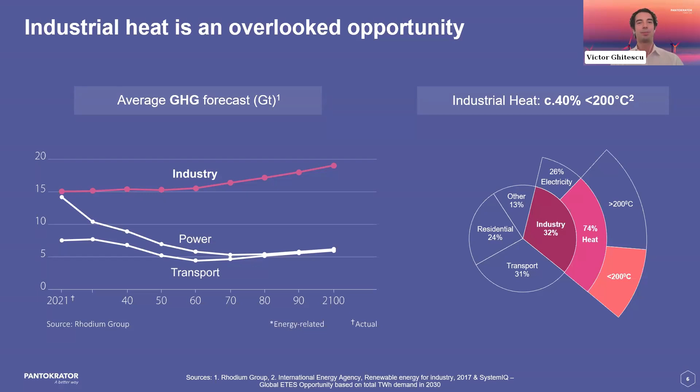Thank you, Andrei. As most of you know, there's been a lot done to decarbonize the power and transport industries in the recent past, and there's still ways to go. However, we think that today the biggest opportunity lies in decarbonizing the industrial sector, where about 3/4 of emissions come from industrial heat. And about 40% of this heat is below 200 degrees Celsius, which makes this portion of the market an ideal candidate for the use of heat pumps.

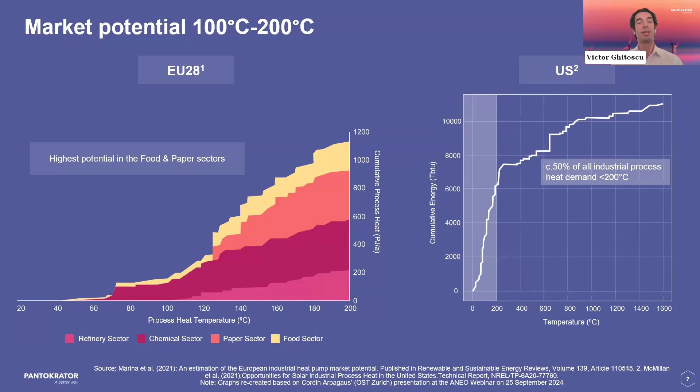As you can see, both the European Union and the United States follow a similar distribution when it comes to their process heat demand, with the European Union having about 40% of its demand between 100 and 200 degrees C, whereas the United States has about 50% of demand below 200 degrees. What's also interesting is that although most industries use some sort of low temperature heat, a few candidates stand out for immediate decarbonization using heat pumps: the food and beverage sector and the pulp, paper, and print one.

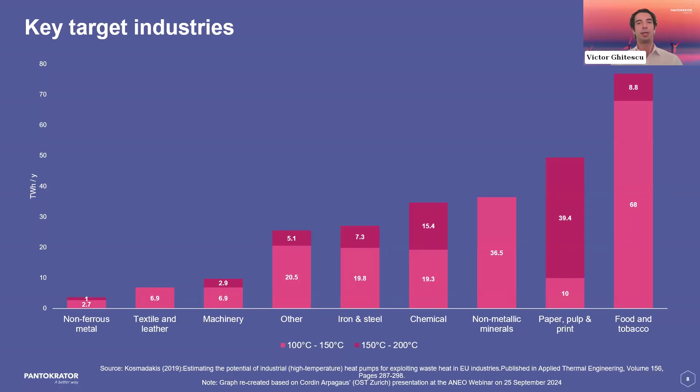Another interesting way to look at this is, as a potential heat pump manufacturer, as you increase your maximum potential temperature output, you unlock a bigger market share. As you can see here, when you go from about 150 to about 200 degrees Celsius, you unlock an extra 30% of the market. That's mostly because the higher temperature allows your heat pump to be used in a wider range of industrial processes.

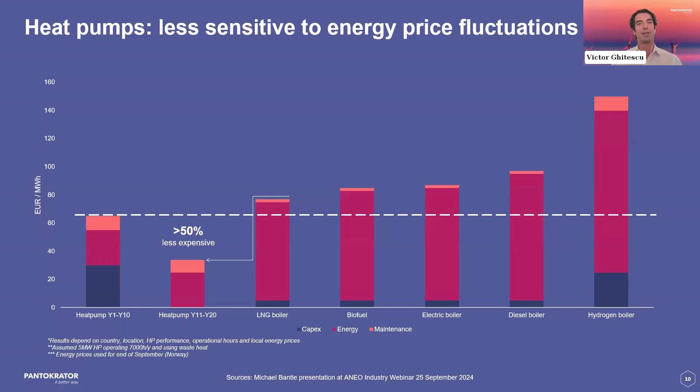to energy price fluctuations. And I want to say that we want to thank Michael from ANEO for providing us with this data. And I'm sure he's going to be able to offer you more color on his findings in the discussion following our presentation.

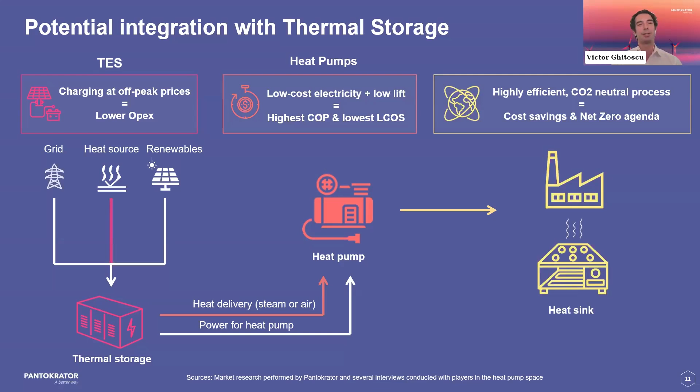Lastly, I want to say that as we've put this presentation and webinar together, we've spoken to a lot of companies and investors and even industry associations. And most of them agree that you're going to have more and more integrations in the future between heat pumps and some sort of energy storage, be it thermal or even lithium ion. We think that this will allow end clients or customers to achieve the lowest potential OPEX, lowest potential levelized cost of heat or steam, while also making good to their shareholders and stakeholders on their net zero initiatives and promises.

Okay, so just coming back to the capital raising side of this industry, today we're really focusing on the industrial side because I think that's where a lot of promise is. But we also thought we'd share what's happening on the residential side, because there is quite a bit of activity. It's a very distinctly different business. But I think given what we're seeing on the tech side, on the fit with the customer and how costs are coming down, from an investor standpoint, this is a place to start focusing, because I think in 25, 26, 27, we're going to see quite a few capital raises of a size that might fit some of the bigger investors.

Okay, so before I hand over to the group and introduce them, some of the areas that we thought are quite pertinent and will pop up in the discussion today is really about where's the technology going? What can it do? What are the implications for that? What's the technology readiness? Is there a barrier of lack of awareness, whether it's at the customer end or at the investor end, and what can we do to help that along? What are the roles that the regulators have to play in this? Also, there's the usual one of cost. How can we bring them down?

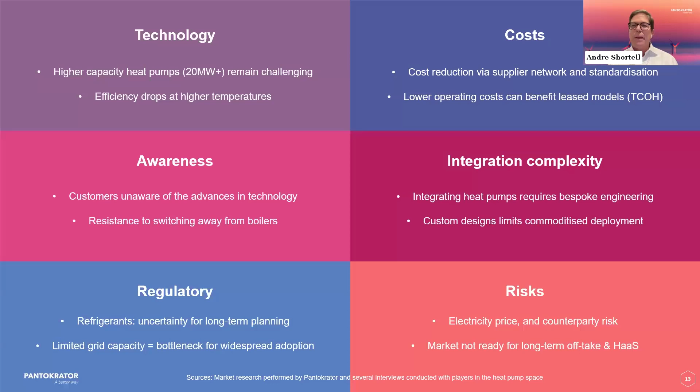this. So let me start by introducing the panel, and maybe I could start with Blaine. Blaine, I've always seen you as a big supporter of industrial heat generally, and of heat pumps specifically. So I think it'd be great if you could spend just 2 minutes on yourself and on what the RTC does to support this.

Thank you very much. So I'm Blaine Collison. I'm the executive director of the RTC. The RTC is, in fact, a global buyer-led coalition focused on decarbonizing thermal, particularly industrial thermal, with renewables. We work on three big lanes of effort: technology, market development, and policy. The bottom line here really is working with our key stakeholders, particularly the buyers, and we'll look at them in just a moment, to actually drive forward on implementation. Our end game is more projects in the ground, which leads to decarbonization. The RTC is co-convened by three organizations, C2ES, David Gardiner and Associates, and the World Wildlife Fund. And if you go to the next slide, please.

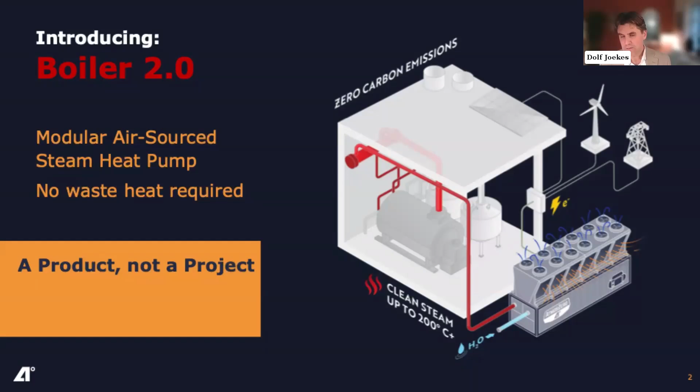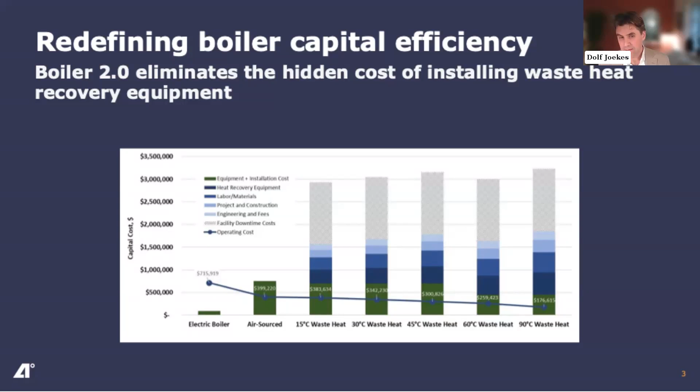Right. Okay. And as a bonus, in the next slide, in addition to providing low-cost steam, our Boiler 2.0 system that you can see here on the left can be integrated with a cooling tower, for example, or a chiller, thereby offering additional benefits to the lowest levelized cost of steam for your system.

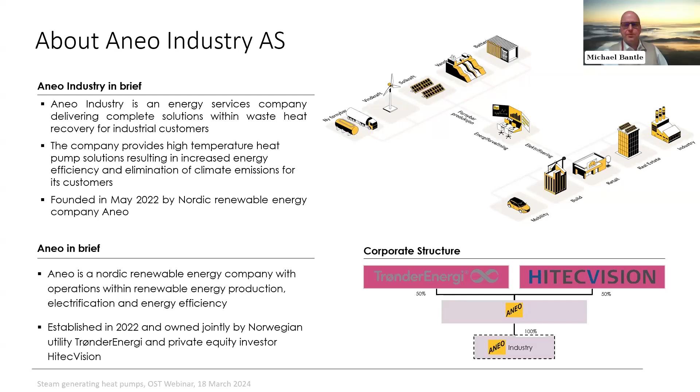Aneo Industry started 3-4 years ago as a project where the challenge or the target was to generate a heat pump that is generating steam and supply to an industrial customer, Felleskjøpet, utilizing excess heat from the same factory. And that was exactly what we then won the prize for, this system, which you can see on the next slide, at least parts of it.

So we were designing a heat pump system based on standardized components and natural refrigerants. This heat pump can utilize waste heat from 30 degrees down to 15 degrees if necessary, supplying steam back to the factory with quite a good Carnot efficiency. I must disagree a little with what Dolf was saying. We're reaching with these heat pumps exactly utilizing waste heat below 30-40 degrees and getting a COP of 3, supplying it back to the factory. When we talk about whether it's efficient or economic, we have to see that this is a standardized unit now for 1.5 megawatts of steam supply, upscaled up to almost 5 megawatts. In that capacity range, I think it makes a lot of sense economically to utilize this heat pump.

Perfect. On the last slide I've prepared, I wanted to outline the main aspects. We weren't doing this as a pilot project, we started this 3 years ago, and we wouldn't have been where we are today without Felleskjøpet. We really needed a client who was willing to put in the little bit of necessary, required extra effort into the project, so that we now actually have a product.

Some of the main aspects, to my surprise, is that we are now installing these heat pumps in locations where there is limited electricity grid capacity available. When we started the project, we were mostly focusing on reducing and substituting fossil steam or fossil boilers. Now many projects start with the aspect of, okay, we don't have enough electricity where we want our factory, so we're now forced to use heat pumps.

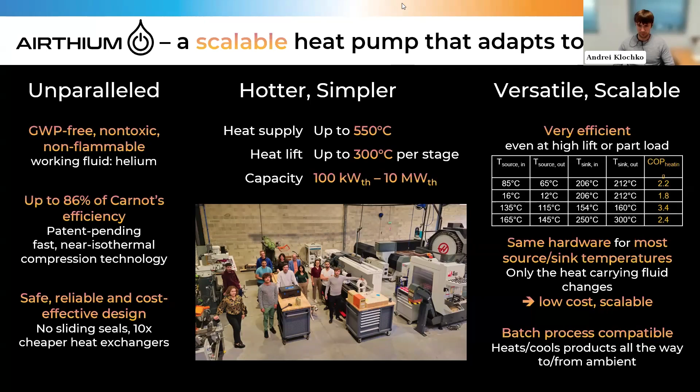Okay, well, now I think we've raised a lot of issues in terms of cost, temperature ranges, scale. I think maybe let's now step back a little bit, and Blaine, you just hosted a pretty significant event in Washington at the end of September, in thermal generally, but you had a pretty big turnout. Tell us a little bit about the mood in the industry, but also what's the outlook over the next, I don't know, 12, 24, maybe even longer months for this sector generally speaking?

Yeah, good questions. And wow, what an amazing overview - I was furiously typing notes here. So from where I sit, and as you say, we're coming on the heels of the annual RTC summit. We sold out this year for the first time, which was amazing. So we had 300 and some people come from around the world to DC to talk about industrial thermal decarbonization.

Fantastic, right? A mix of technology providers and third-party project financiers and consultants, and of course the end users, right? So the end users, those global industrials whose logos I shared earlier, they all have climate goals. They're different, they're on different timescales, but they all have goals, and they are all trying to figure out how to get from here to there.